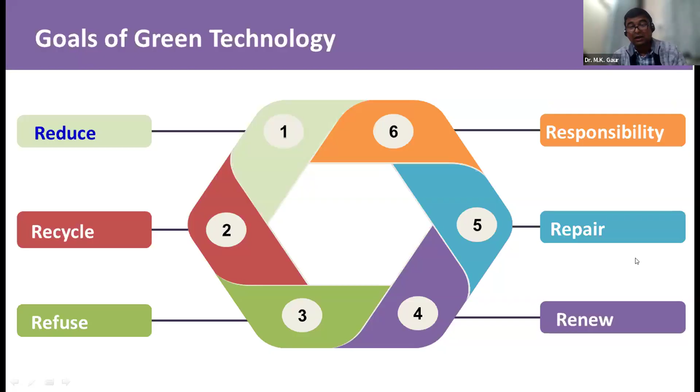Refuse use of single-use plastic, we have to refuse it. Responsibility - it is our responsibility to clean and keep our planet as well as our society clean, and repair whatever you have been using - it should be repairable.

And lastly, renew - we have to use renewable energy sources for our energy requirements. So examples of some green energy technology include recycling, clean water, clean air and energy - all these are examples of green energy technologies.

If we see the current scenario of power production in India from various sources - central sector, private sector, and state sector, considering thermal, renewable, and nuclear - it comes around 4,56,757 megawatts of electricity installation capacity we currently have in India.

Out of this, renewable is around 2 lakh 5,520 - that is the biggest data.

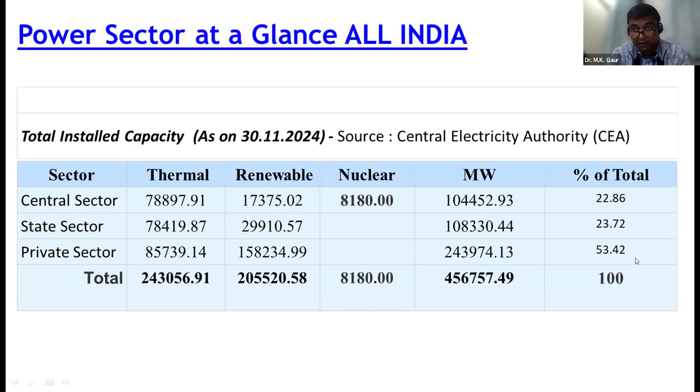And if we break down the renewable from solar systems, solar energy will be around 1 lakh 58,000, which we have achieved this year from solar, wind, and small hydro.

That is current news which came out on 3rd of January, and I think it was also published all over Madhya Pradesh, that 2024 was the warmest year ever in the last 10 years. October had the highest temperature of the month recorded in the last 123 years - October was the hottest month of 2024. The average temperature increased by 0.65.

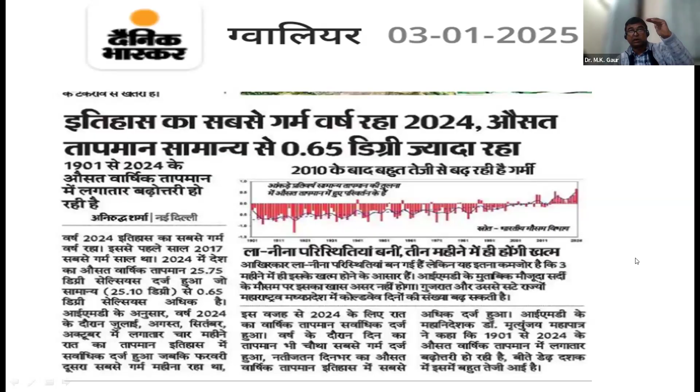All the sustainable development goal agendas and climatic researchers have been working on how we can reduce the average temperature increase to 1.5 degrees. So researchers are working on that.

This is a trend showing how temperature is changing from 1901 to 2024. It's increasing - that dotted line shows the continuous increase in average temperature every year. This year was the hottest in the last 10 years; before this, 2016 had an average temperature increase of 0.54 degrees Celsius.

If the temperature rises by 1.5 or 2 degrees, most cities, some parts of Bombay also, may have water coming out from the sea as sea level increases.

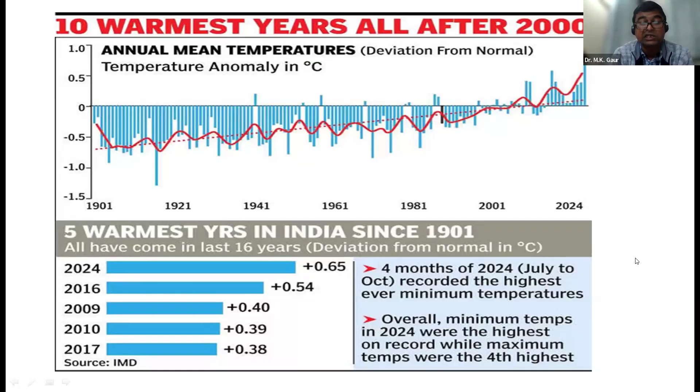Moreover, earlier the rate of 1 unit of electricity from the photovoltaic system was around 9 to 10 rupees per unit. Now it is around 2 rupees 36 paisa per unit.

Also, a lot of companies working in Madhya Pradesh have been developing ultra mega solar power plants in various parts of the state. In Omkareshwar, a floating type of photovoltaic power plant is already developed, and one is going to be developed in Morena - they have been developing the solar park there.

Coming to the amount of available solar energy in India, on a clear day with 250 to 300 days, the solar radiation varies from 1600 to 2200 kilowatt hour per meter square - that is the annual average solar radiation available in India. Generally, we take the reading from the solarimeter, which comes out in watts per meter square.

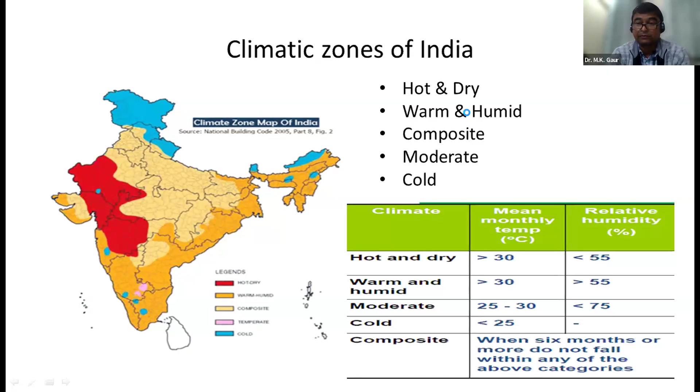Coming to what are the solar thermal systems - we all know about domestic hot water heating systems. Everybody knows solar desalination is used to get purified water. Solar drying is there, heating of rooms by air, cooling by vapor absorption refrigeration systems. Using solar radiation, these are all systems where we can harness solar energy for our use, whether for heating, cooling, or generating electricity.

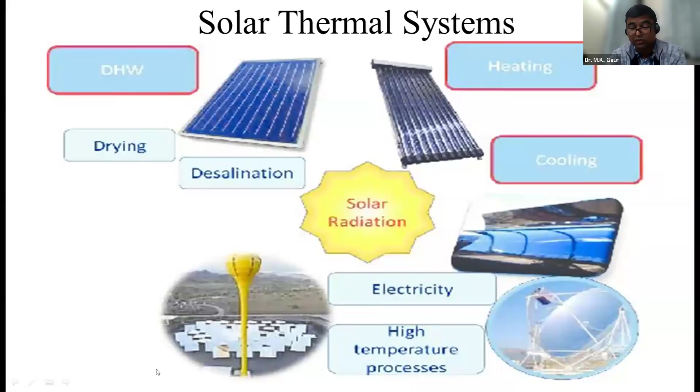There are two different systems that can be utilized: one is the photovoltaic system, the other is the thermal system. From both systems we can harness energy from the sun. So two parts are there.

There are two rooms - one where we get hot water by harnessing solar energy. Another part where we use the hot water for heating of the room. We can use a radiator in the room and circulate the hot water.

But sometimes we cannot directly use the water. We can use a heat exchanger where brine water or saline water with salt may absorb the energy, and that salted water can be circulated to the room where we need to heat.

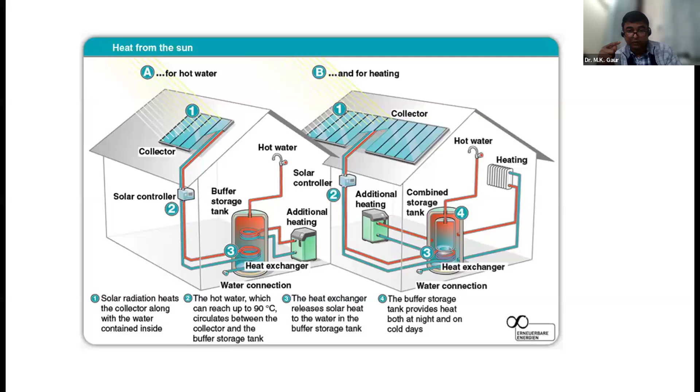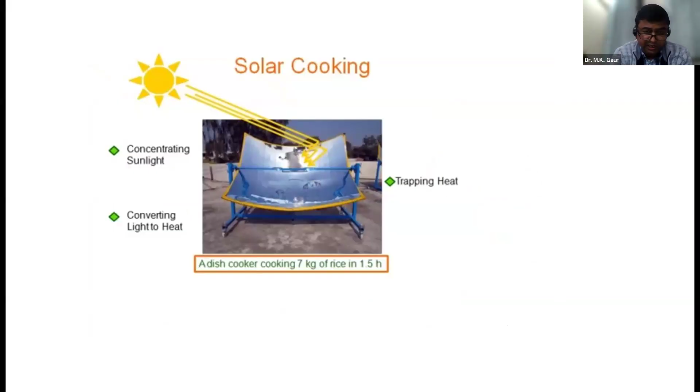Another system is solar cooking, which is also very important. Normal solar cookers exist, and dish type solar cookers are there. In dish type solar cookers, we generally concentrate the radiation at the focal point of the dish, where we can put the items which have to be cooked.

Coming to the solar power plant - basically we harness solar energy with the help of a heliostat, and there may be oil which can be heated and circulated through a heat exchanger, where water absorbs that energy and converts into water vapor. That is used in a turbine where we can produce electricity.

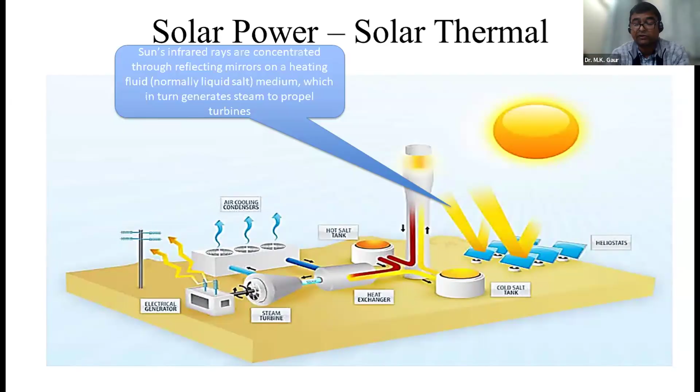Coming to my topic that I'm going to discuss now, we are going to start with what we did in our MITS and during my research career, what I've been doing. Some parts of which I am going to present here.

One is solar distillation, on which I have produced one PhD. One of my students completed PhD under my guidance, another student is currently doing it, and I have also completed my PhD particularly in solar distillation.

So what is the purpose and why this desalination, solar distillation, is important? Because if we talk about the area available on earth on which fresh water is available, it is around only 1%. We also talk about the quality of drinking water.

Most people in India are consuming water having a TDS level around 500, or more than 500. 500 may be permissible, but in some parts of India they have been using water with a TDS level around 1000 ppm.

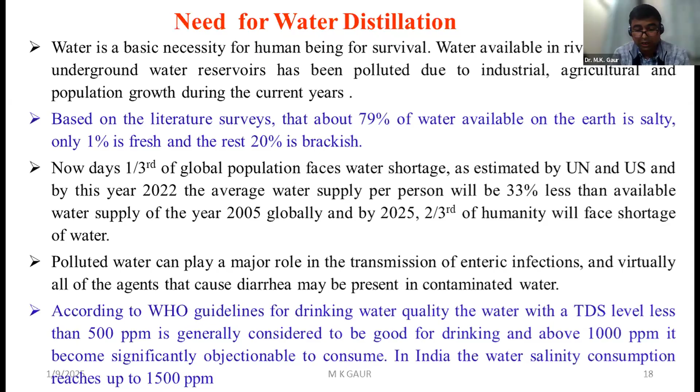If we use this solar distillation technology and solar energy, we can convert brackish water into potable water. In villages and less developed parts of the country, it is very difficult to get potable water, and people have to work hard to get it. Even then, they have been using brackish water, not good water, for their daily use. In the past, Chennai had zero water days, and there is a water crisis in Bangalore also.

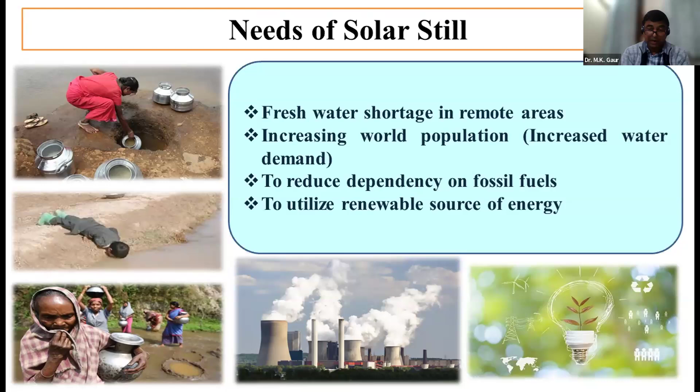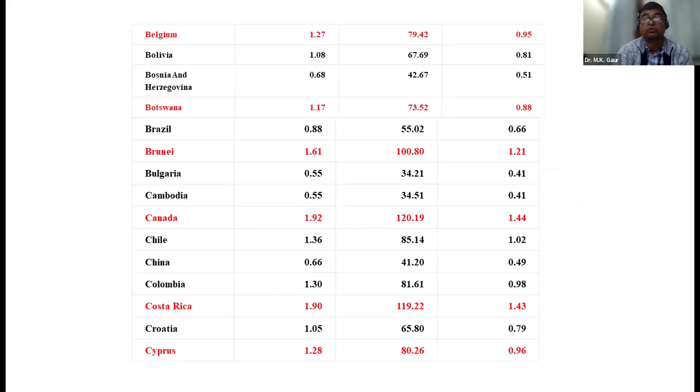Coming to the cost of water, in India the cost of water is around 20 rupees per liter, but somewhere else it is more than 100 to 200 rupees. Norway has the highest cost, coming around 220 rupees per liter.

Coming to the history of desalination: the first solar distillation apparatus was developed by Della Porta in 1589. He used an earthen pot to get the essence of green leaves, which is used for medicinal purposes. He took an inverted earthen pot, put the leaves inside it, and using heat energy coming from the sun, the essence of the leaves evaporated. This evaporated part was collected through a beaker.

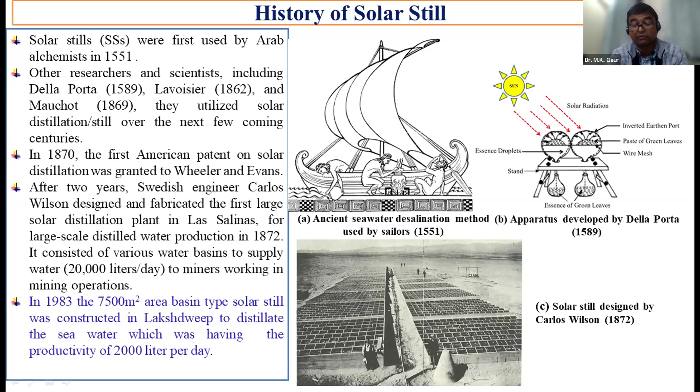They developed a solar distillation plant, solar stills, in 1983. In 2020, Prime Minister Narendra Modi ji inaugurated a solar desalination plant as well as a solar energy park, a hybrid solar energy park having 30 gigawatts of hybrid renewable energy capacity that can generate 30 gigawatts of electricity. The desalination capacity is 10 crore liters per day, purified using the solar desalination plant.

Coming to the principle of solar still: the radiation coming from the sun is partly absorbed by the glass surface, partly reflected back to the atmosphere, and partly transmitted inside the basin, the area where we fill the water, which gets energy after transmission through the glass.

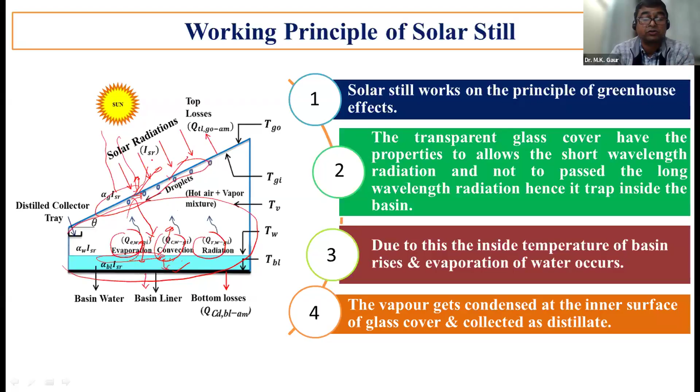Coming to the types of solar still: one is the passive solar still, and the other is the active solar still. In passive solar stills, the heating of the system works passively.

The heating of the basin water takes place inside the basin, only by the solar radiation which comes after transmission through the glass. There is no additional system attached to heat this water. This is a passive solar still, where heat transfer within the water takes place because of free convection and buoyancy, as the water gets heated and heat transfer occurs.

This is a single slope, and this one is the double slope. The single slope should always have the glass cover facing south. We chose this orientation because we are living in the northern hemisphere, where the sun rises in the east and sets in the west. So throughout the full day, the glass of our solar still faces the solar radiation and absorbs it.

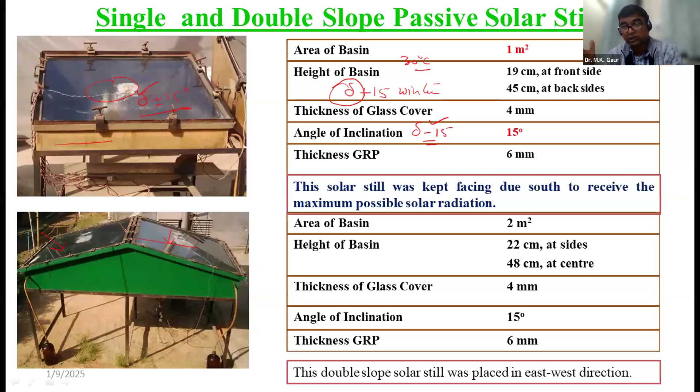They have kept a smaller angle than the latitude because they have to save on materials and cost. They want to save money, and often nobody knows what the correct angle should be. They install the photovoltaic system over their roof without knowing the right angle, so it becomes difficult to understand why their system is not performing better.

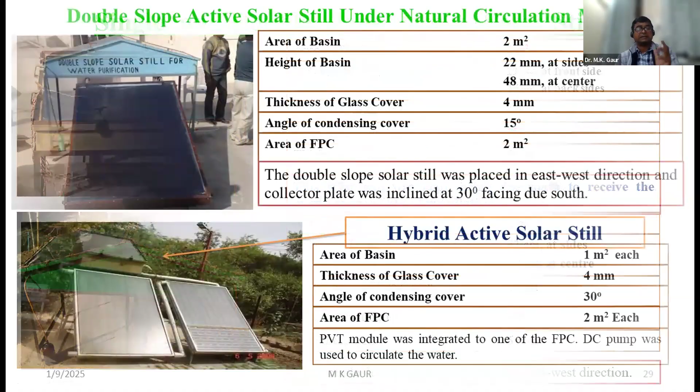This particular solar still, if we talk about both solar stills I am showing you, one is the active solar still. Why is this active? In the previous slide I talked about the passive solar still, where only the solar radiation coming after transmission through the glass was used to heat the water. In this case, solar radiation also comes through the glass.

Secondly, I have also been using the energy from a flat plate collector. And at the bottom side, that is the hybrid active solar still. If we use the word hybrid, it means that in the same system there are two kinds of energy: one is thermal energy, which I have been using, and the second is electrical energy.

The PV panel is there, and the electrical energy I get is utilized to run the pump. The pump is just below this panel, and it is used to circulate the water through the flat plate collector and the basin of the solar still. So with two kinds of energy in one single system, this is known as hybrid active.

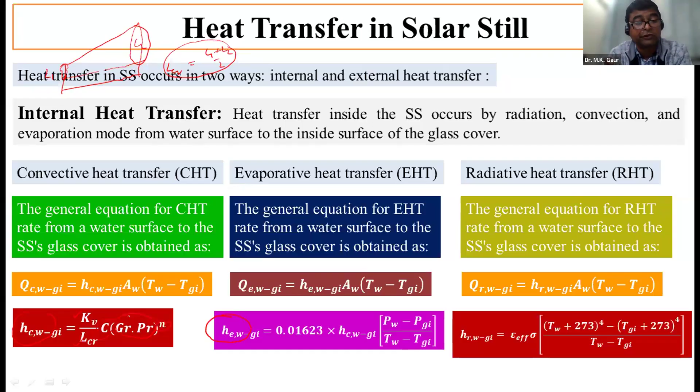That will be used while doing the calculation for the solar still, because for every system, rather than using constant values of C and N, if you want an accurate solution for your system matching experimental results, you can calculate your own value of C and N using the experimental data.

Top loss is the heat loss from the glass surface to the ambient air. That is the convective heat transfer coefficient. Convective heat transfer takes place from the glass surface to the ambient air, and radiative heat transfer also takes place.

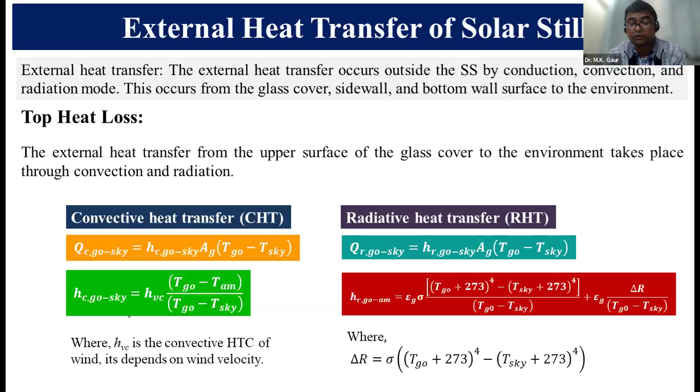These relations exist too, but because of the lower value of heat transfer, most researchers use the correlation already given on the basis of temperature. If we put in the value of temperature, we can directly calculate the convective heat transfer coefficient and radiative heat transfer coefficient, just by using the glass temperature.

Coming to the bottom loss: there will be conduction from the inner surface to the outer surface of the bottom, and convection from the bottom surface to the ambient.

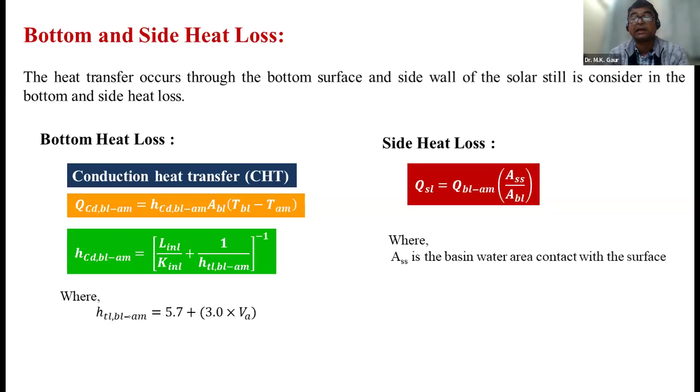Side loss may also be there from the solar still, but in most cases we neglect it. When we write the assumptions, we state that we are neglecting the heat loss from the side walls of the solar still.

So after discussing all of this, what are the factors which influence the productivity of the solar still? One is the water depth, because most of the energy is absorbed by the water. The second is the slope of the glass cover, equally important, because we have to transmit the maximum amount of solar radiation falling on the glass surface.

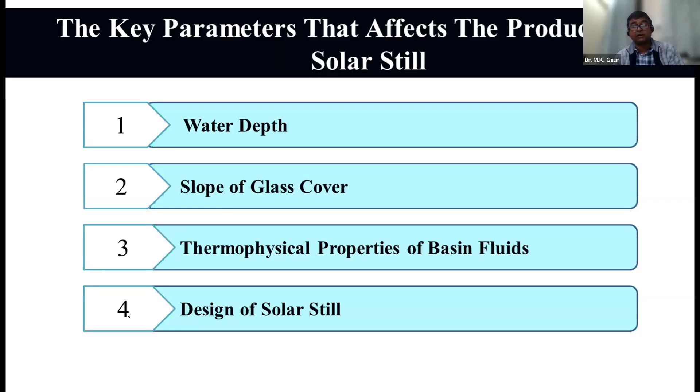The third factor is the thermophysical property of the basin fluid. Whatever brackish water we have been using, the thermophysical property of that fluid is very important. The design of the solar still is equally important—whether the surface, bottom surface, and side surfaces are insulated or not.

There's another system. If you understand the outer conditions, you can develop the indoor solar still. I prepared this model to understand the actual condition of the solar still at various temperatures.

This particular system is a constant temperature bath, where we can keep the temperature of the water constant by setting it, say at 35 degrees. We start the temperature from a range of 35 to 85. For passive solar stills, the range is around 35 to 55 degrees centigrade.

If we talk about the active solar still, the range is from 35 to 85 or 90 degrees. Higher temperatures may be achieved by using an active solar still.

So we have to check the performance of our solar still by setting the temperature of the constant temperature bath at 35 degrees, then increasing by 5 degrees each time—40, 45, 50—and checking the productivity of the solar still at each given temperature, while keeping the room air still and stagnant.

Various thermal models are generally used for the calculation of various heat transfer properties of the solar still. The first model is Dunkle, which is given for the passive solar still range. How do we calculate the convective heat transfer coefficient?

There is a direct correlation given by Dunkle. He gave the value of N and C. We generally use the Grashof number and Prandtl number raised to power N, multiplied by C. So that particular HCW equals KV divided by L, the characteristic length, into C, Gr, Pr.

After taking some experimental data and finding out the correlation, the value of C comes out to be 0.88, with delta T coming from the Grashof number, and N value is 0.3, up to the range of 55 degrees.

For delta T, he gave the relation involving TW and TCI, the water temperature and inner glass surface temperature, and the partial pressure at the water temperature and at the inner glass surface. Here is the water, this is the glass, and we record the temperature at the inner surface. On the basis of the inner surface, we calculate the partial pressure.

There is a formula, an exponential relation, to calculate the partial pressure. PW is the partial pressure at the water temperature, which is a constant value. Now we can calculate the value of HEW.

He developed very good relations to calculate the value of C and N. Everywhere we have been using the value of C and N, as shown in the previous slide, that particular value of C and N.

Based on the experiment, Kumar and Tiwari developed the model. On the basis of regression analysis, we can calculate the value of N for a particular set of passive solar still and active solar still. We have to take the reading, and on the basis of that reading, we can calculate it.

But what I did in the theoretical model I developed to calculate the value of convective heat transfer coefficient was, rather than keeping the value constant, note that every researcher kept this value constant in the denominator.

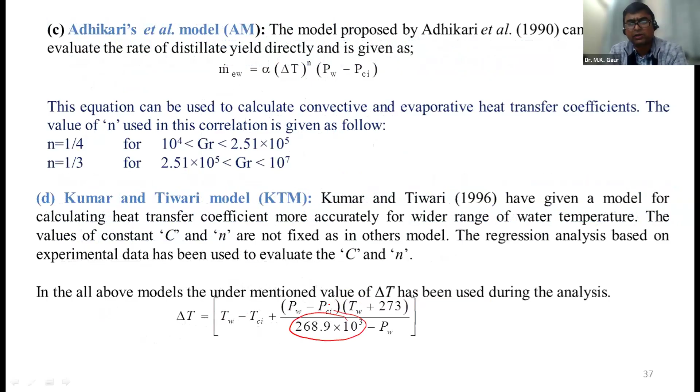As shown in the previous slide, every researcher, whether it is Dunkle, Adhikari, or Chen, has already used this value as a constant. Rather than keeping this constant, I have kept it as a variable.

This value varies with the temperature: as the temperature increases, the value increases, and as the temperature goes down, it goes down. So all the parameters, whether physical properties, are a function of temperature, which I have used to calculate the thermophysical properties of the solar still.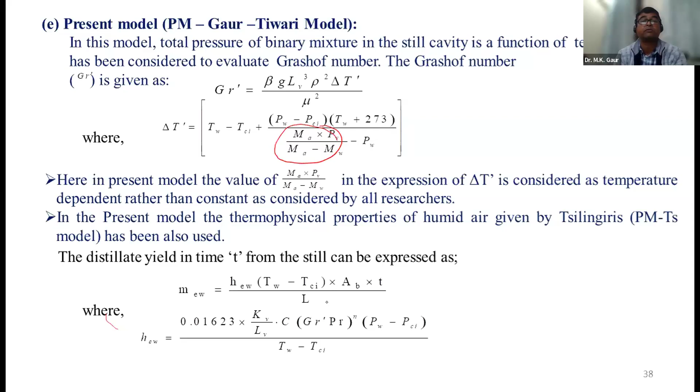On the basis of that, I have calculated the value of C and N by using this regression analysis. A mathematical expression is used, and based on this, I have validated the theoretical results with the experimental results.

After that, the result reported that the least error is given by my own model, which I used to calculate the value of yield, that's the distillate output coming from the solar still, around 10.7%. But the least result given by the Kumar and Tiwari model is around 13%. The Adhikari model gives a high 31% error, and the Chen model gives the highest error, around 38%.

So this is over the entire range of the solar still, from lower range to higher range, around 85 to 90 degrees, from passive range to active range. That is the entire validation range, for validation from the lower range to the higher range, which is passive to active range.

If I have to check how my system will perform in Leh Ladakh, where the ambient temperature is lower, let's take what I showed earlier, the indoor simulation system.

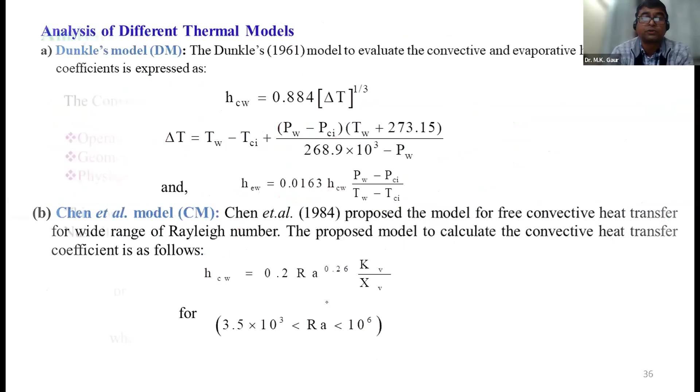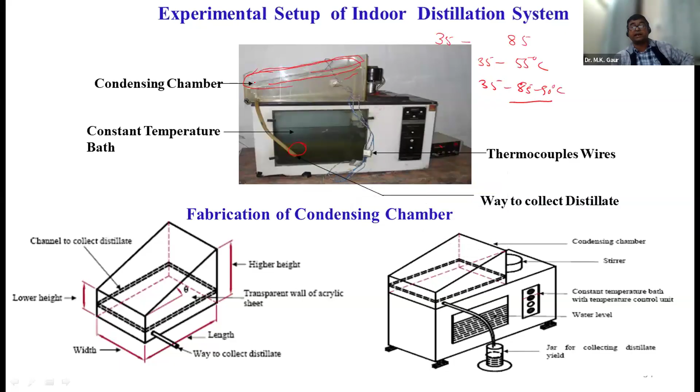In that indoor simulation, I kept ice cubes over the surface of the still. I completely filled the space with ice and thermocol, kept the thermocol over this, and maintained a constant temperature of around 4 degrees centigrade most of the time. After that, I recorded the distillate output and compared my result with ice and without ice, to see how the performance changed because I kept ice over the surface.

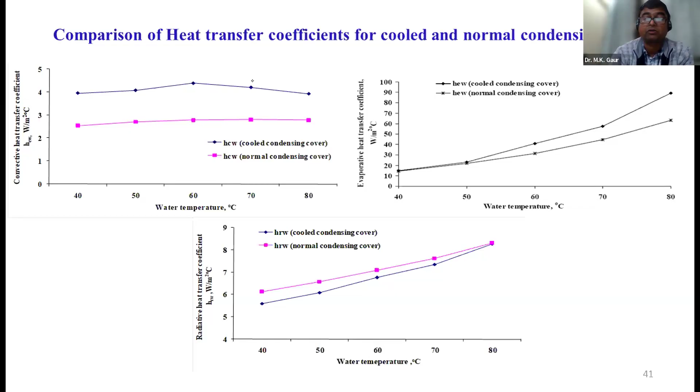So convective heat transfer increases, evaporative heat transfer increases, but radiative heat transfer goes down. This means if the outer surface ambient air temperature is lower, as in Leh Ladakh, Srinagar, Manali, or Rohtang Pass, the radiation is very good but the ambient air temperature is very low. So in Leh Ladakh or Manali, our solar distillation system will perform better in that climatic condition because of the ambient air. If we lower the temperature of the glass cover surface, higher will be the evaporation over the glass surface.

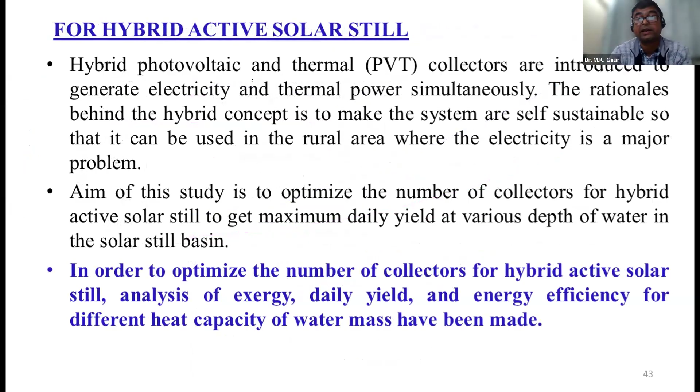Coming to the hybrid active solar still, if we check the thermal performance of our hybrid active solar system, as I already discussed in the previous slide, the hybrid system simultaneously generates two kinds of energy at the same time: electrical energy, which is used to run the pump, and thermal energy, which is harnessed by the flat plate collector. The pump is just below the panel.

Inside the plate collector, water circulates from the basin water through these pipes and the pump. Water flows through like this, and through this it goes back to the basin. The temperature increases as it flows, and this system is known as a hybrid active solar still.

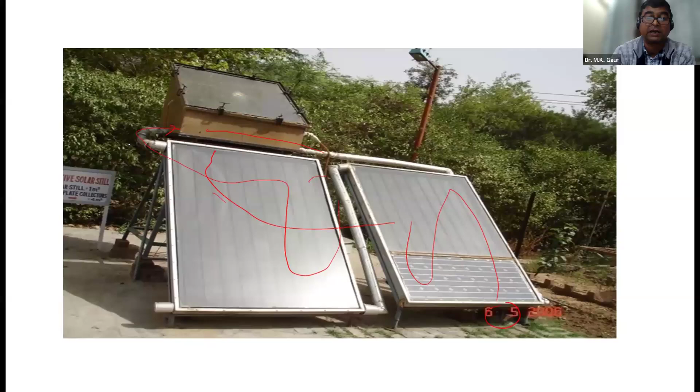Suppose this is one number of collector, here is one number of collector which is partially shaded. So what should be the optimum value of the partial flat plate collector? We optimized this using experimental data and some theoretical data, to determine what number of partial collectors would give higher performance of our solar still.

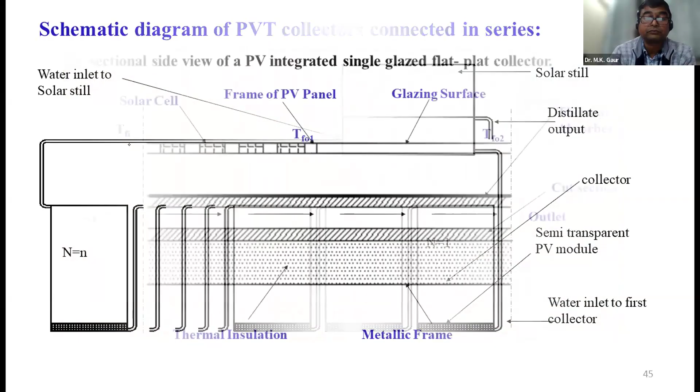So talking about the structure, this is the line diagram cut-section of our partially covered photovoltaic panel. This is covered with the cell, this is glass, and just below the cell and glass plate is the tube where the water is flowing. We can develop the thermal modeling for this particular system.

For this system, we can develop the TFO. I have developed the equation for what the TFO will be after 1 hour. The theoretical value can be calculated using my model, the theoretical relation I developed, and TFO2 can also be calculated.

If we validate this system, particularly for the single flat plate collector, the intensity of solar radiation increases from morning hours till 1 p.m. and goes down till 5 p.m. This is the same pattern found everywhere, in every research paper. The solar intensity, if we draw the curve throughout the day, increases and then goes down.

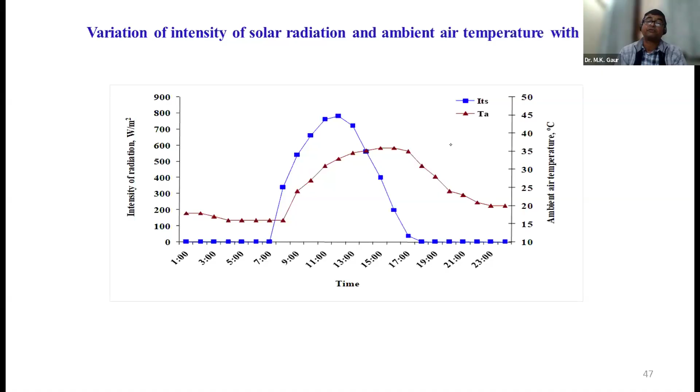But if we see the pattern of temperature, we achieve the higher value at 3 p.m. This happens in every research paper because at 3 p.m. both diffuse and direct radiation play a major role. The diffuse radiation, which is around 3 p.m., becomes more and plays an important role by increasing the ambient temperature. So due to the higher value of diffuse radiation at 3 p.m., the higher value of ambient temperature is recorded at that time.

If we see the hourly variation of basin liner temperature, water temperature, inner glass temperature and outer glass temperature, it will be found that the higher value of temperature is achieved by the basin liner.

If we validate this system for the mass of water, there is a 5 centimeter water depth at the solar still, and mass flow rate through the pump is around 0.055 kg per second, with 2 collectors. Calculating this same pattern, the higher value achieved at the basin liner temperature will be around 80 to 85 degrees.

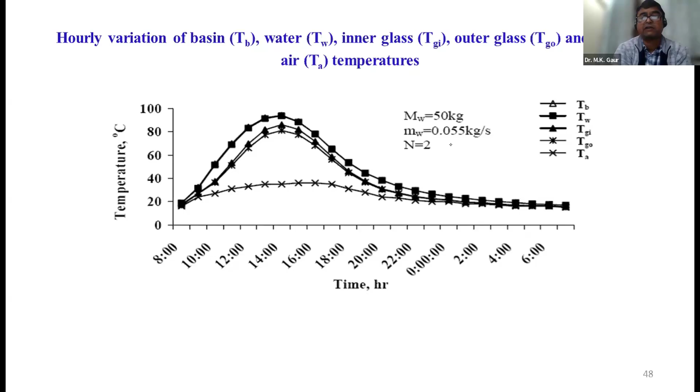For the hourly variation of yield, if we record the value, the yield will be higher at 2 p.m.

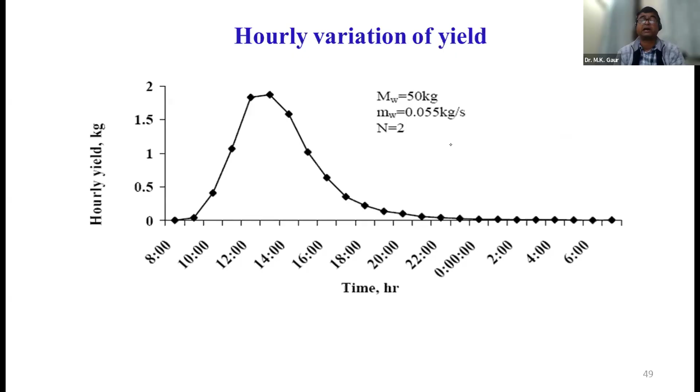We record the distillate output for 24 hours, starting from morning 8 a.m. and doing the experiment till the next morning 7 a.m., recording the whole value. The higher distillate output will be around 1 to 2 p.m., because around that time we get the higher value of water temperature as well as the higher value of basin liner temperature, and also at 1 p.m. we achieve the higher intensity of solar radiation.

If we optimize and look at the yield, as we increase the number of collectors, the daily yield increases but the daily efficiency decreases. As the area of the collector increases, the heat loss also increases from the flat plate collector in the same proportion. But the productivity does not increase as much as the heat loss, so the daily efficiency goes down.

If we increase the number of collectors for a particular 50 kg mass, the daily thermal efficiency is the mass output divided by the input, which is the energy received from the solar still - that is the mass of the water multiplied by the latent heat, divided by the radiation falling on the glass surface area. If we sum the whole hourly mass output and divide by the total intensity received by the glass surface, we get the daily efficiency.

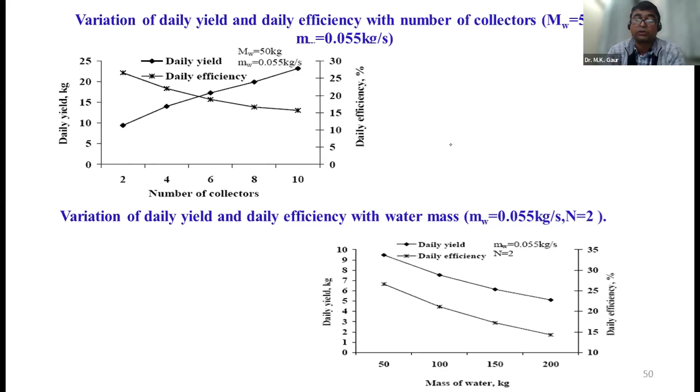The daily yield also goes down if we increase the mass of water, because the water will absorb the energy rather than evaporate - it stores the energy first. So with increasing mass, the daily yield decreases. If we increase the mass of water in the basin from 50 kg to 200 kg, the distillate output, that is the daily yield, decreases, and the daily efficiency also decreases. So what should be the basis on which we optimize our system?

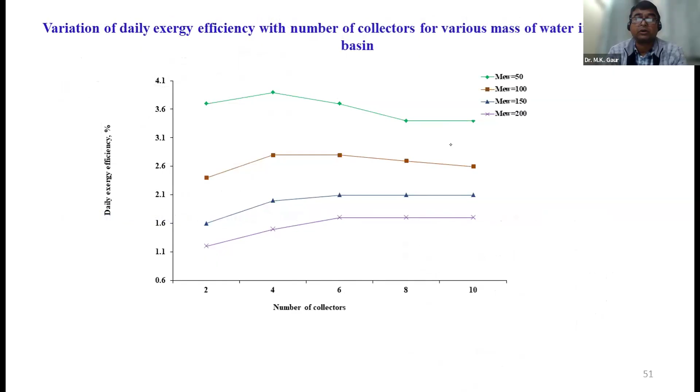We optimize our system on the basis of exergy. If we look at exergy for 50 kg, then 4 collectors will be better. For 100 kg, 6 collectors will be better. And similarly for 150 kg mass, we can optimize our system on the basis of exergy.

If we validate this for our hourly yield, the correlation coefficient comes around 0.99.

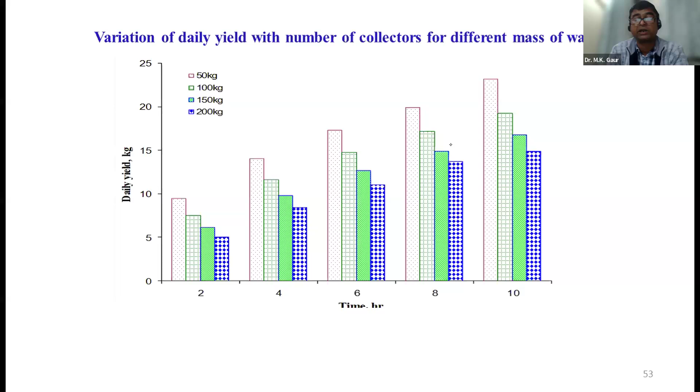So this gives whatever the model which I developed for calculating the value of hourly yield gives a closer result with the experimental. These are all cumulative results for the amount of daily yield which we can receive.

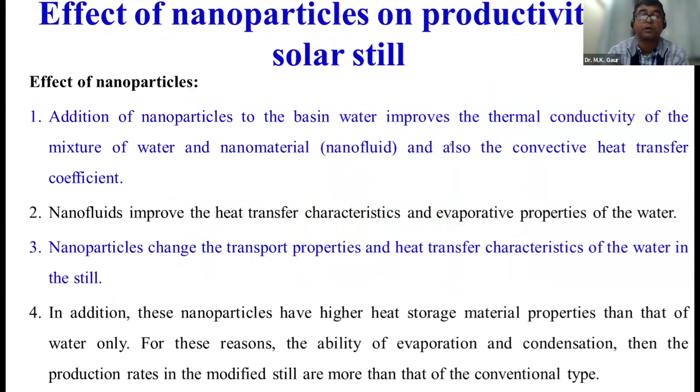If we use nanoparticles, how does the nanoparticle affect the productivity? I have already told in the previous slide that the thermophysical property is equally important and equally affects the performance of the solar still. So by any way in which we increase the temperature of water or increase the thermophysical property of the basin water, it improves the productivity of the solar still.

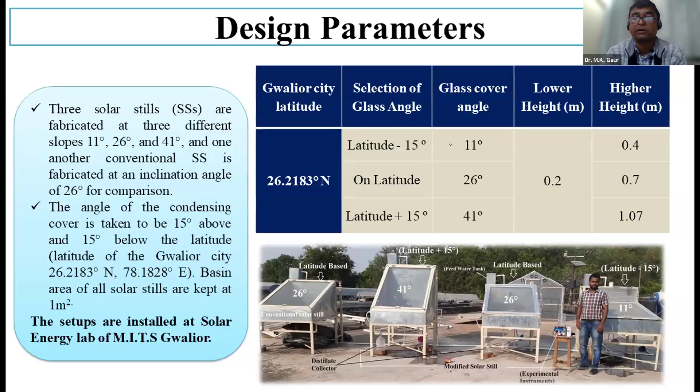We have in MITS, we have the solar still with different slopes. Latitude of Gwalior is 26, latitude plus 15, and once again latitude and latitude minus 15 degrees. So we have a lot of systems in our MITS. My researchers have already been working on that.

This solar still we developed in MITS and did the experiment, preparation of the nanofluids. We have prepared the nanofluids in our laboratory. A very important thing is the concentration. What concentration of nanoparticle is important to get the performance of the solar still.

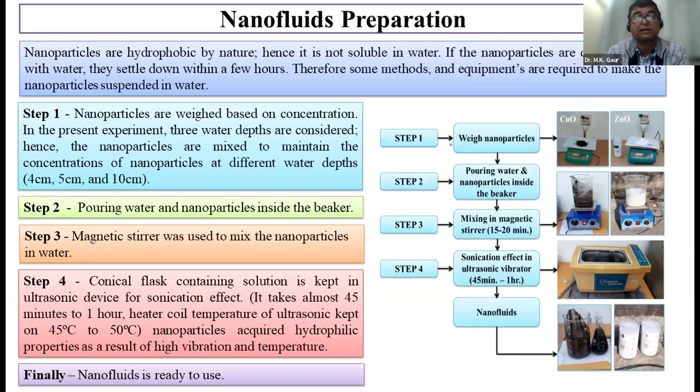The second one is how to make your nanoparticle hydrophilic. So for that, the sonication effect and magnetic stirrer, these things we use to make it hydrophilic with the water.

So which concentration is better? We prepare the solution and keep it for 24 hours and check which solution is stable. In my case, it is observed that 0.05% concentration is better for the water and nanoparticles.

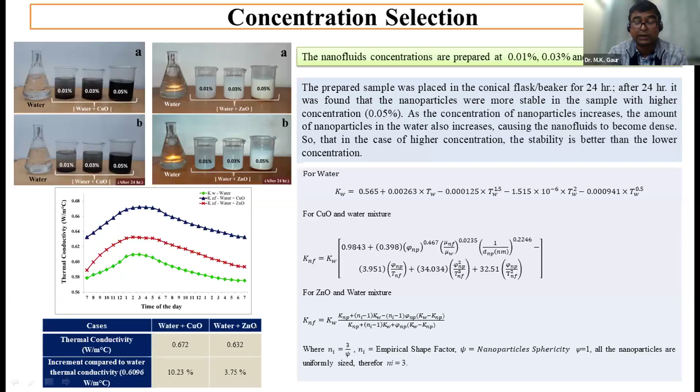And we have also calculated the thermal conductivity of the water as well as the nanofluids, that is the nanofluids copper oxide and zinc oxide, for the whole day, considering the thermal conductivity changes with the temperature of water. Considering the recorded temperature of water as it absorbs the solar radiation, we calculated the value of K. It is reported that there is an increment of thermal conductivity by 10% in copper oxide and 3.75% in zinc oxide, as calculated in my case.

If we go to 21st December, at the 41 degree angle for Gwalior, the solar still kept at 41 degrees receives the highest solar radiation. So we recorded the value of convective heat transfer coefficient and evaporative heat transfer coefficient for various depths of water in the basin at the 41 degree angle. This experiment was done in winter at the angle of 41 degrees.

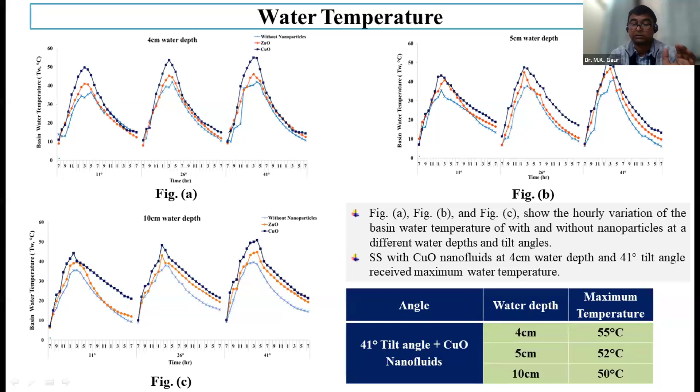It is observed that the maximum water temperature achieved is 55 degrees centigrade at 4 centimeter water depth. So if we are using nanoparticles, copper oxide or zinc oxide, we have to keep the water depth at 4 centimeters. It will give better output of water, so the water output is higher at that 4 centimeter depth.

Similarly, we have recorded the pattern of convective, evaporative, and radiative heat transfer coefficients. A higher value is achieved with the nanoparticle copper oxide. If we use copper oxide as the nanoparticle in the nanofluid, it gives better performance. We get higher values of convective and evaporative heat transfer coefficients than in normal cases as well as with the nanoparticle zinc oxide. So copper oxide gives the better results.

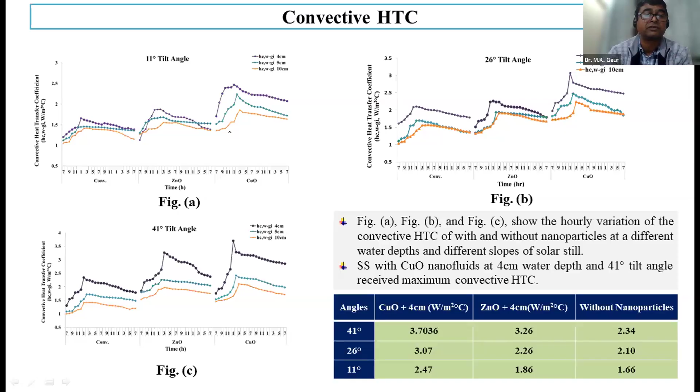We also checked this for the 26 degree tilt angle, and the same higher value was reported. We also calculated the value of the convective heat transfer coefficient from the basin liner to the water. The higher value of convective heat transfer coefficient is achieved at the 41 degree angle and 4 centimeter depth with copper oxide particles.

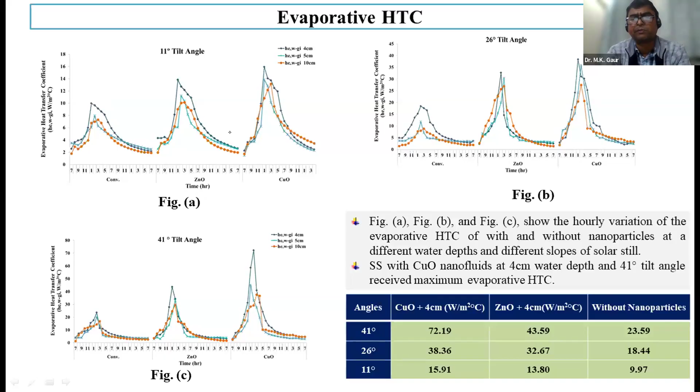That we have reported. All we did experimentally and recorded and published a number of papers on this. And if we go to the CO2 analysis, I have also done the cost analysis and CO2 analysis.

Coming to this, because of the time, the next speaker is going to wait.

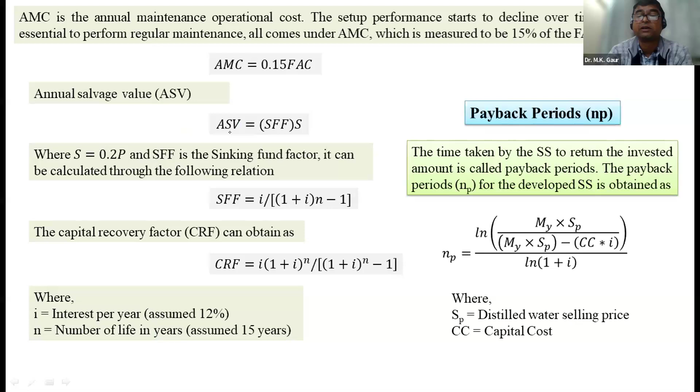If we consider the selling price of 10 rupees, 15 rupees and 20 rupees, and check what will be the payback time, considering the annual productivity calculated combined for 15 years: if we consider selling price of 10 rupees, the payback period for copper oxide will be around 1.69 years. And if we sell it for 15 rupees, that will be 1.09 years.

So that we have calculated based on the embodied energy and all kinds of energy. All costs we have considered, annual cost and various costs, we have tabulated in this form and recorded what will be the payback time for the solar still with zinc oxide nanoparticles and copper oxide particles.

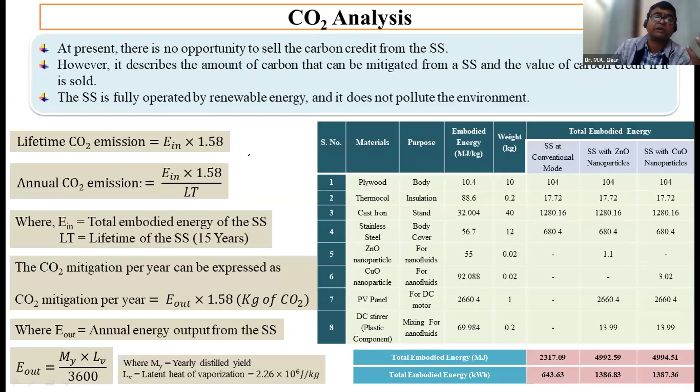If we talk about CO2 mitigation, that is how much greenhouse gas we can save by using this solar still, considering a lifetime span of 15 years. Most research multiplies by 1.58, which is the amount of greenhouse gases emitted by 1 unit of electricity generated by coal. So if we are generating electricity by coal, the amount of CO2 or greenhouse gases emitted will be 1.58 kg.

So if we calculate the amount of CO2 which we are going to save, that will be around 5.97 for the conventional system. If we have been using zinc oxide, it will be around 7.75. If we have been using copper oxide, it will be around 12.32 tons of CO2.

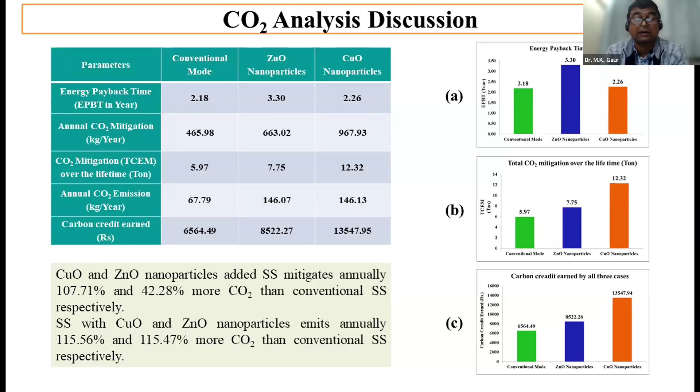And if we talk about carbon credit, considering the cost of one credit for 2021, the highest cost in terms of rupees will be 13,547.95 rupees, which we can save or earn in 15 years by using and selling the carbon credit.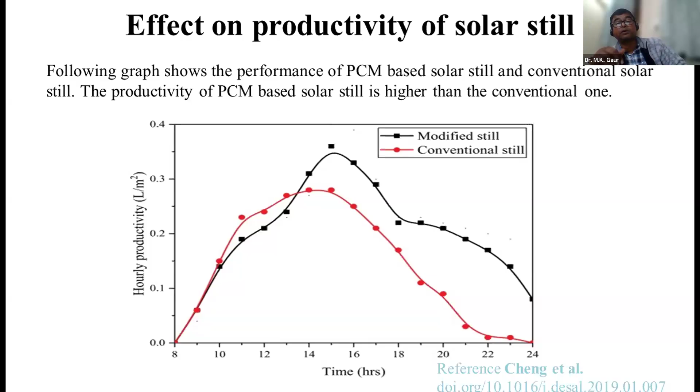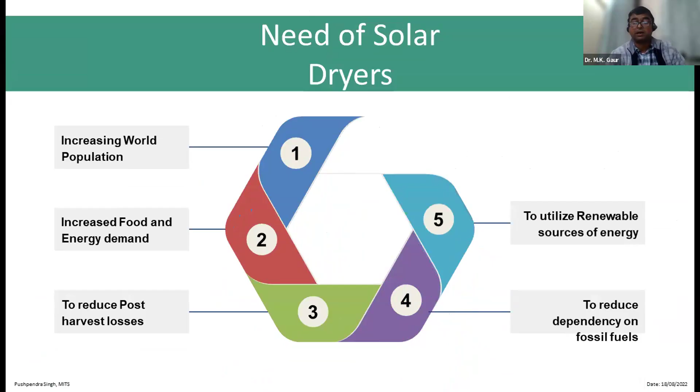If we talk about the dryer, the second thermal system I am going to discuss is the solar dryer. Solar dryer is very important because, particularly with increasing population, the demand for food is also increasing.

We have also reduced post-harvesting losses, because if we do open sun drying, there are losses, and maybe contamination of crops occurs. There may be dust over the crop, and the possibility of contamination affecting color, texture, and everything about the crop we are going to dry.

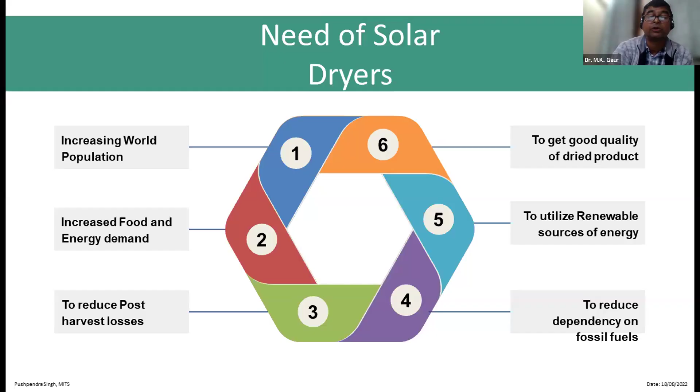So solar drying systems are particularly controlled drying or uncontrolled drying. Uncontrolled drying is open sun drying. Controlled drying includes active drying and passive drying. In passive drying, only the buoyancy effect causes heat transfer through free convection.

But in active drying, we use a fan to circulate the air throughout the dryer, which passes through the crop, and the moisture gets evaporated from the surface of the crop.

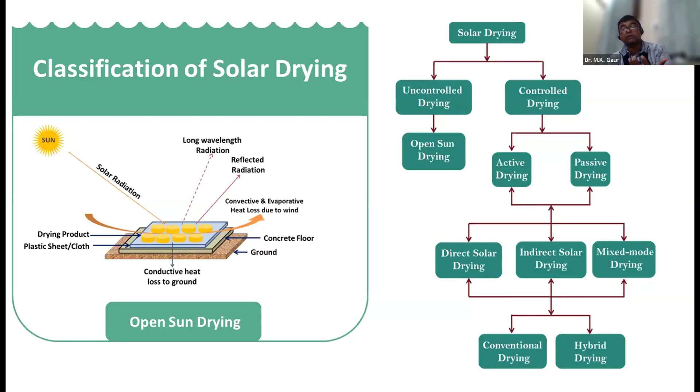These include direct dryer, indirect dryer, and mixed mode dryer. In a direct dryer, we just keep the crop inside the dryer, and solar radiation falling over the glass or canopy cover is transmitted to the crop, where moisture gets evaporated from its surface.

In an indirect type dryer, we use air heated by a flat plate collector, which is circulated through a closed area where we put the crop.

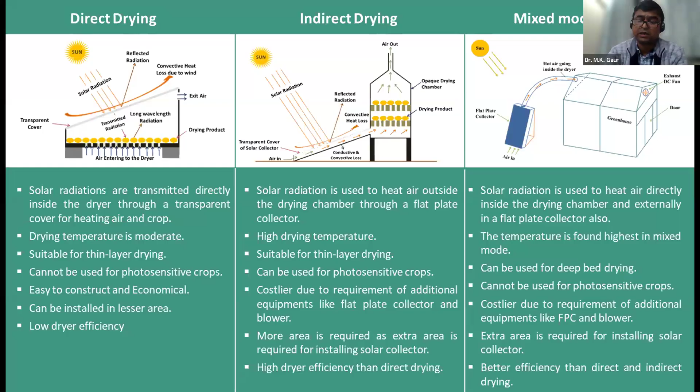The third one is the mixed mode, where we can use the air heater as well as the direct dryer on which the radiation falls. That dryer is a hybrid dryer greenhouse, which we developed at MITS.

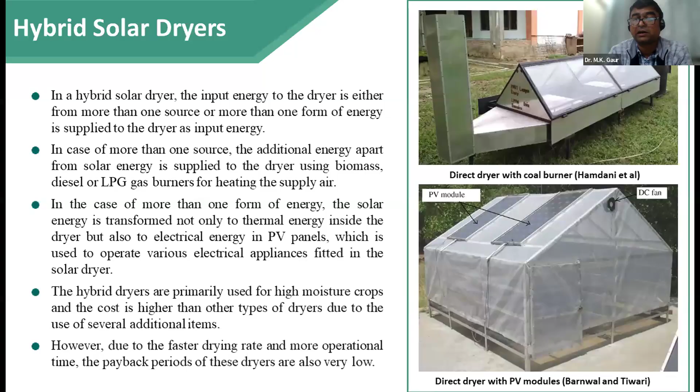Other types of dryers have also been developed by researchers, some using burners with gas flame. There are an ample number of dryers that researchers have developed and experimented with, but I will talk about the dryer which I developed - the hybrid active solar dryer, developed at MITS.

This particular material is polycarbonate sheet. It's durable, density is more, and the heat loss is less as compared to glass and plastic sheet. So it gives better performance. That's why we have chosen this polycarbonate sheet for the greenhouse dryer.

This greenhouse has its surface facing towards south, because the solar panel generates electricity which can be utilized to run this fan. We use this fan to circulate the air through the bed of the crop.

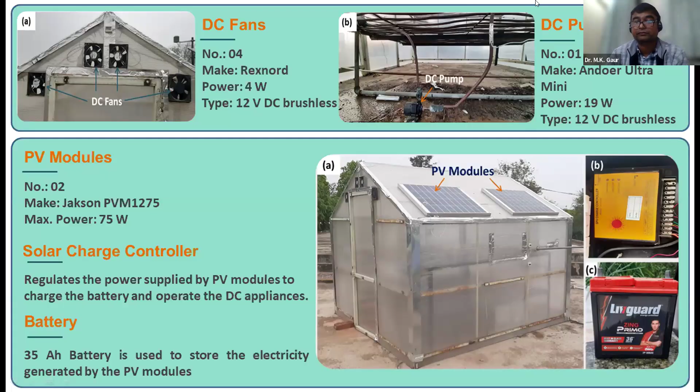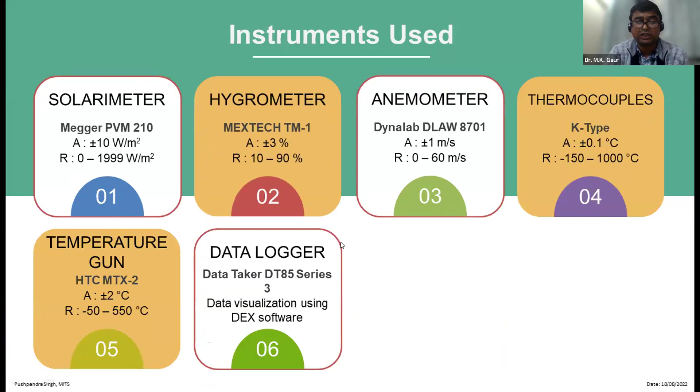All instruments we use for measuring: velocity of air, thermocouples, hygrometer for humidity measurement, solarimeter to measure solar radiation, and a data logger to record global radiation, wind speed, wind direction - everything. We have a data logger. Some crops which we dried in this particular dryer include bottle gourd, tomato, and ginger.

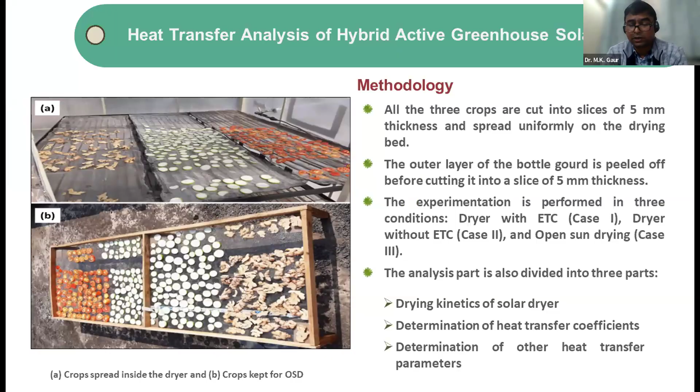We dried these in our dryer and developed correlations also. This correlation was developed by my student, Pushpendra Singh, and we found these correlations give a better drying rate as compared to those developed by other researchers.

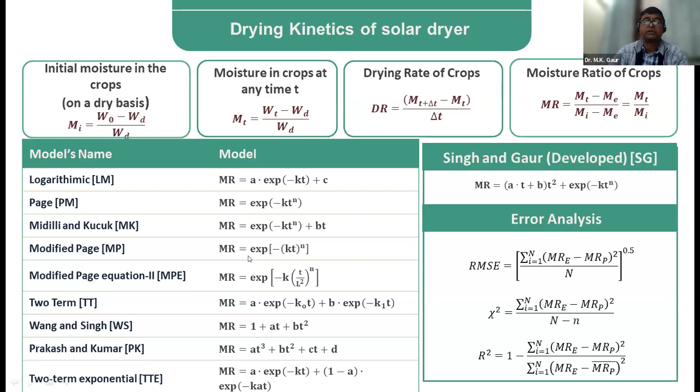These are all correlations for the drying rate given by various researchers.

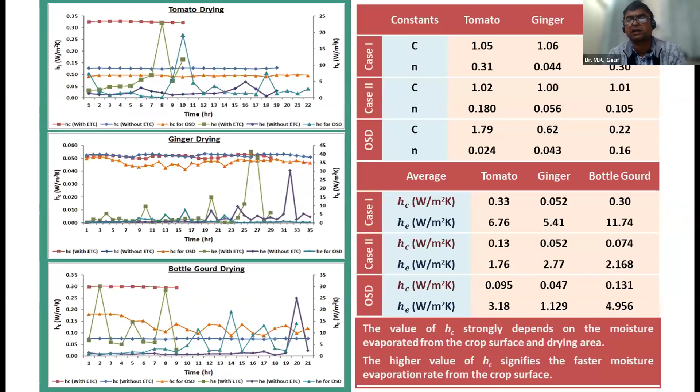We have calculated the heat transfer coefficient and drying rate for drying tomato, ginger, and others. Everywhere we have reported that our system takes less time to dry the product as compared to other dryers or open sun drying.